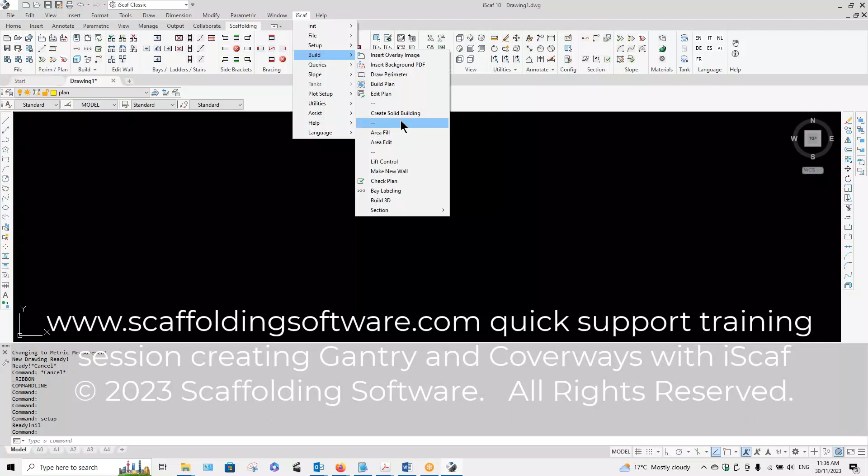So what I'm saying is, yes, in the future we will have something like a make gantry and build gantry option as well. Okay. All right.

So your gantry, is it 2.4 meter wide by 2.4 meter bays? 2.4 meters wide by 1.8. Okay, so 1 meter long, am I correct? Hold it, so 1 meter long bays, so the fit type. 1.8. Okay, so it's the other way around. Let's start again. The bays are 2.4 long and 1.8 wide.

Yep. Okay, so of course they can be any dimension based on whatever scaffold you're using. All right, so 2.4, let's do this again. It's going to be 2.4 meter long and 1.8 wide, right? Yes. Okay, and because it's a gantry, we need heavy duty, so we want truss transoms, correct? Yes. Correct. Okay, so that's fine.

And of course, we have no hop-ups, right? No hop-ups. No. Yep. Okay. And how high is the gantry? What's the top working deck? The gantry is 5.2. Okay, so it's going to be 5.2.

Okay, so I think we can just say 5, and the jack extension can handle the extra 200. Yep. Oh, look, just for the purpose of showing you, let's go 5.2 anyway.

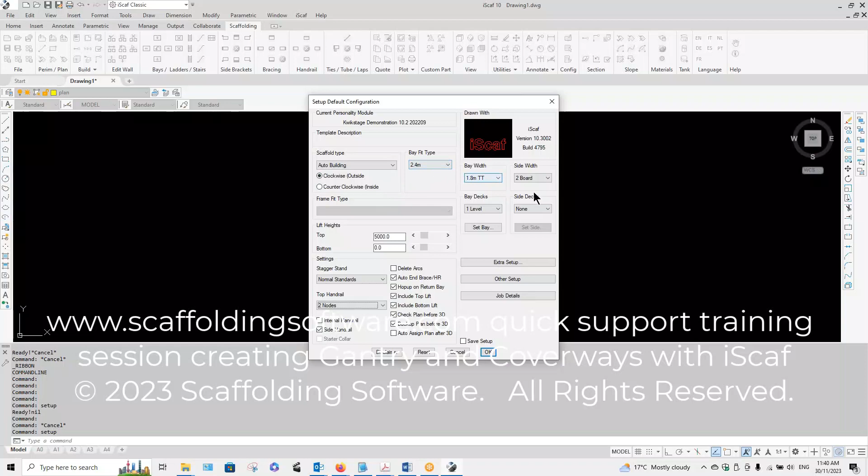Okay, and then do you need internal handrails on the inside as well, or only the outside? No, just the outside. Outside only. Okay, all right, so we can do that. Okay, so that's our setup, that's our basic setup. I don't think there's anything special we need to do here.

It's going to be 2.4, so that's fine. Okay, any particular wall tie you can think of? Yeah, just the standard, I'll just leave it. Okay, I'll just leave that.

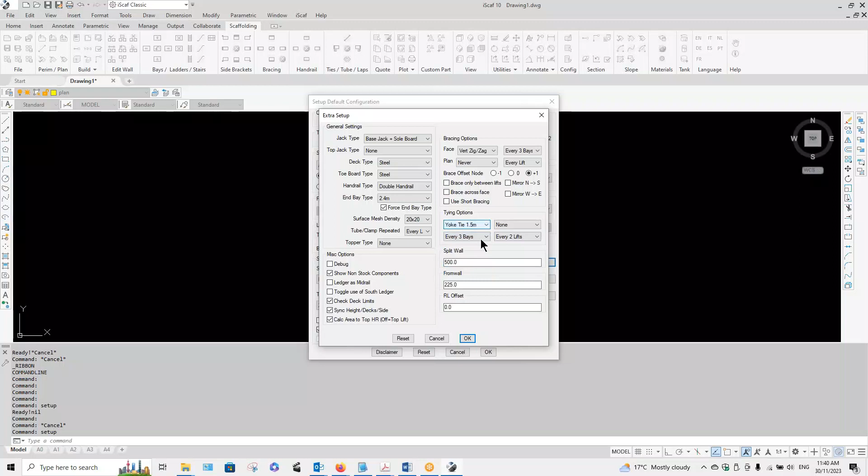All right, so how many bays is this gantry? How long is this gantry going to be? One side is 100 meters and it's like 90 degrees. The other side is 40 meters. Wow, okay, so let's keep this simple.

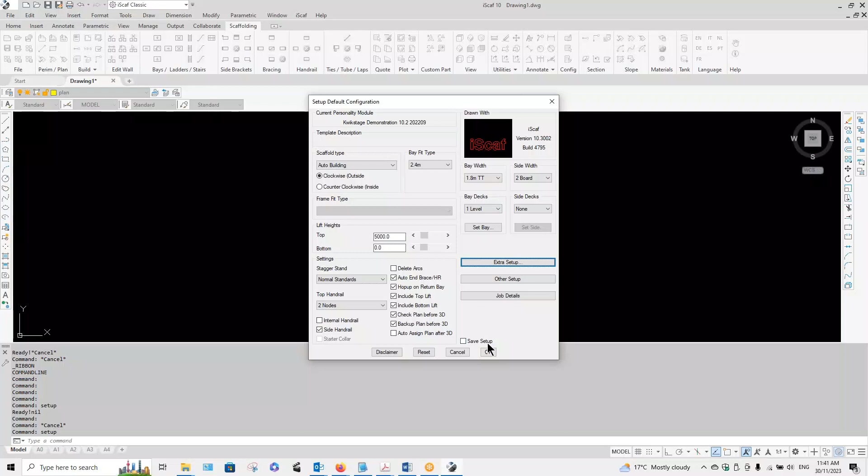We're not going to draw that. You know how to draw walls. Yep, you'll be able to do this, and I'll be able to help you a bit more later. But let's just do a 10 bay - let's just do a 10 bay scaffold of a gantry. Okay, so click OK. Yep.

And then I'm going to perform a make wall. Mm-hmm. And then I'm going to force that to be straight, and I'm just going to make 10 bays. Yep.

Okay, so from endpoint to endpoint. So as we said, let's start again. 2.4 long and 1.8 wide, right? Yes.

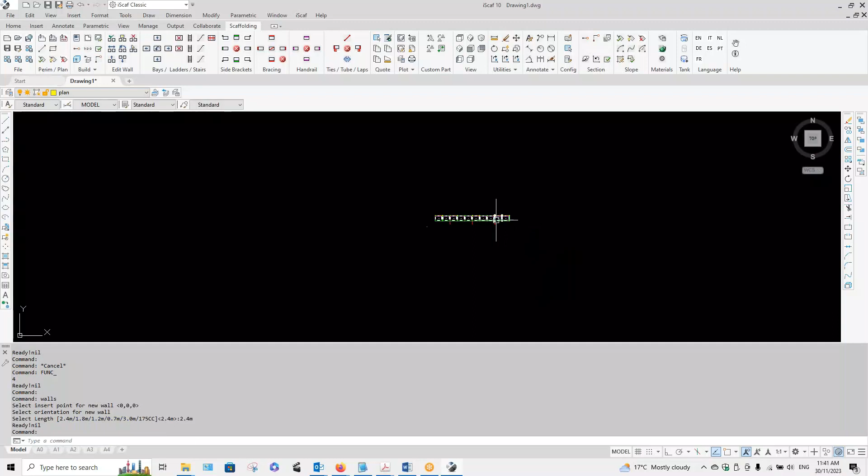All right, now we both know when it builds this to 3D, it's not going to be right because it's going to put too many transoms on every 2 meter level, right? You understand? Okay, yep. Right.

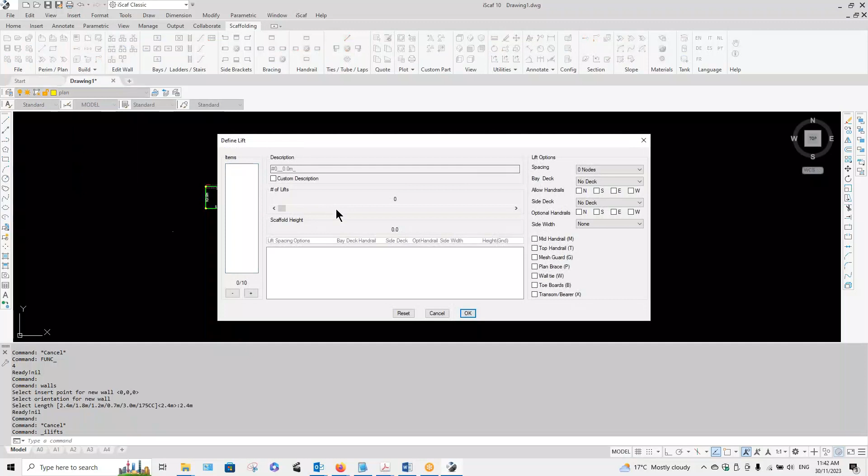Okay, so having said that, we could actually use lift control to achieve that possibly as well. Lift control is a way of... have you played around with lift control? Because there's actually a good YouTube tutorial on how to do that. See this lift control? Okay, see that? This is another way you could possibly do this, but let's just use the old method before we had lift control.

Okay, all right, so I'm going to save this as Gantry. So save this as Gantry 1.

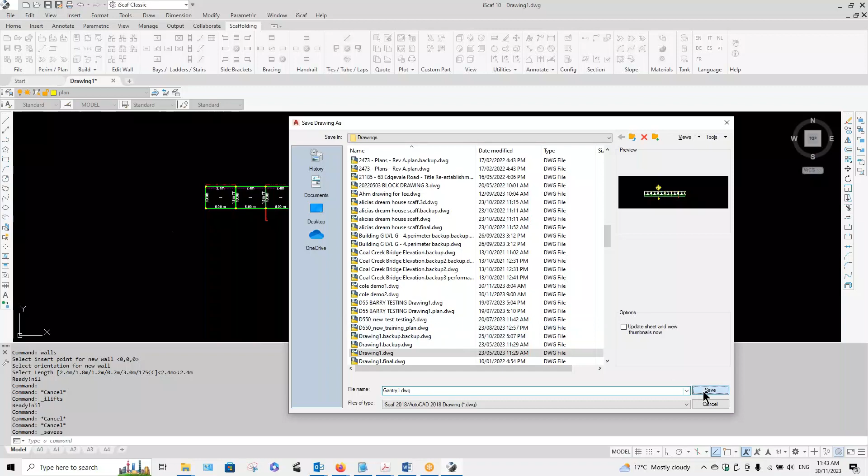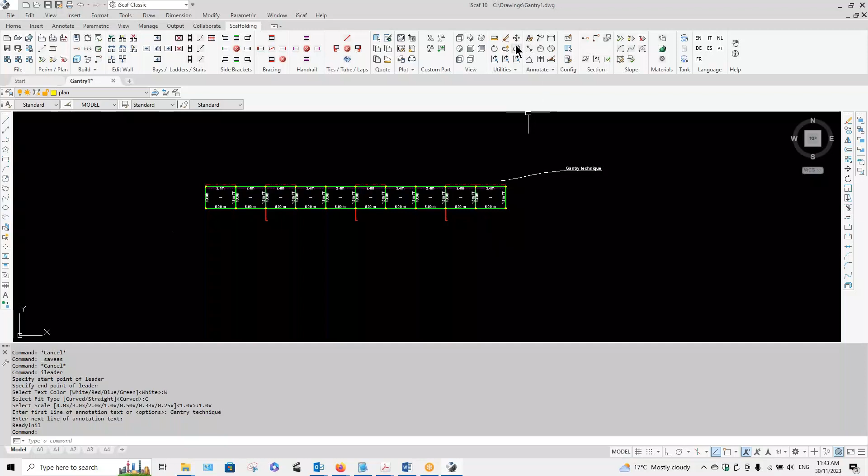All right, now as you know, you can annotate this and explain everything you want, right? You can actually use arrows and things like that to annotate the drawing and write text. So under annotation, you can just have this and say, okay, but you can write your own, whatever special style of gantry you're doing, you can annotate that the way you want, right? But you can also say things like, do another thing here, draw some more text here, just point to here.

Am I correct in saying you would want double-legged standards? Yes, please. Yes.

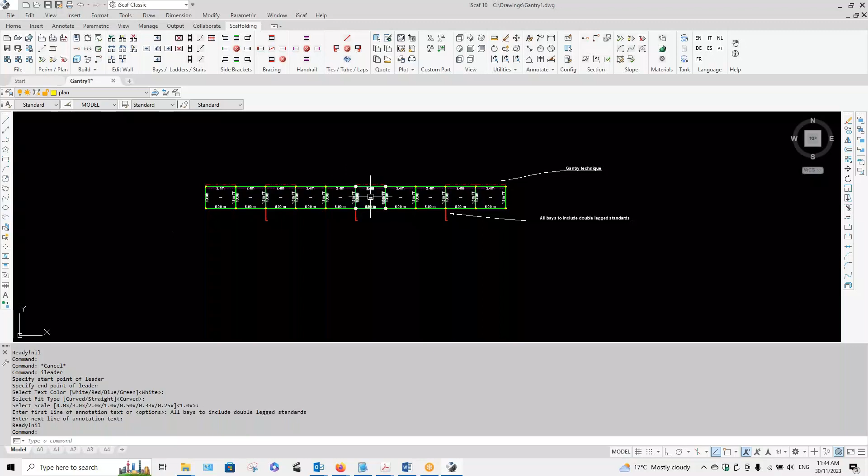So in some ways, this is already in plan, that's a gantry, right? Okay, the users don't have to see more than that for a plan design. But of course, in 3D or in a side elevation, they may want to see that. And also, this design is not going to give you the correct quantity list at the moment.

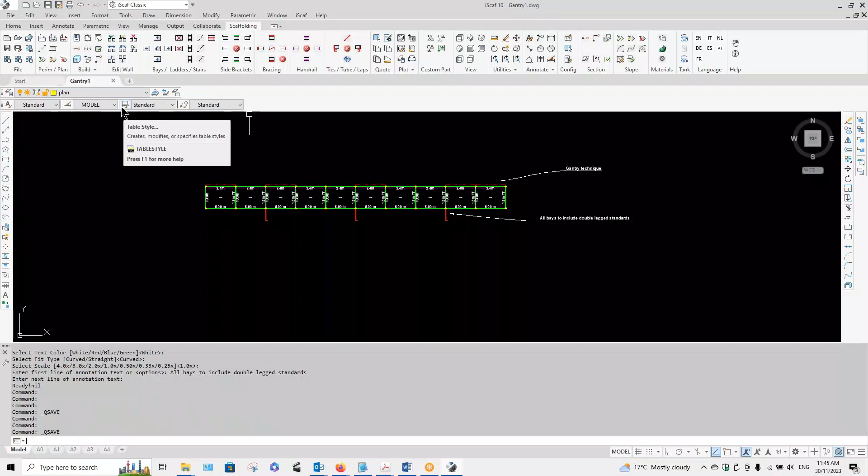But let's save this as it is so far, and then we can build this to 3D. Okay, so we just build this to 3D. Yes, yes, and we build this on. So we know straight away, okay, so this is our 3D, all right?

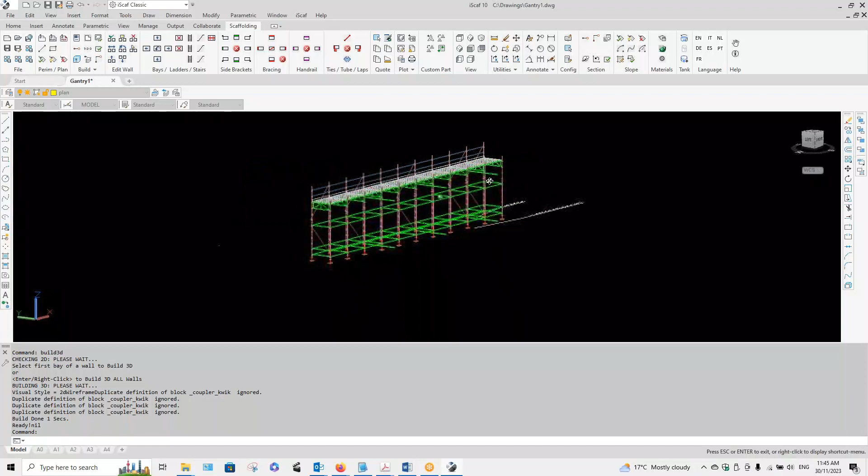So we have an issue here in that we don't want those additional levels along the way. Okay, but that can be done. So this is how you can do it, all right? I'm going sideways, and I can actually erase, under utilities, I can erase these transoms, right, like that. Okay, I'm windowing that, and they're gone.

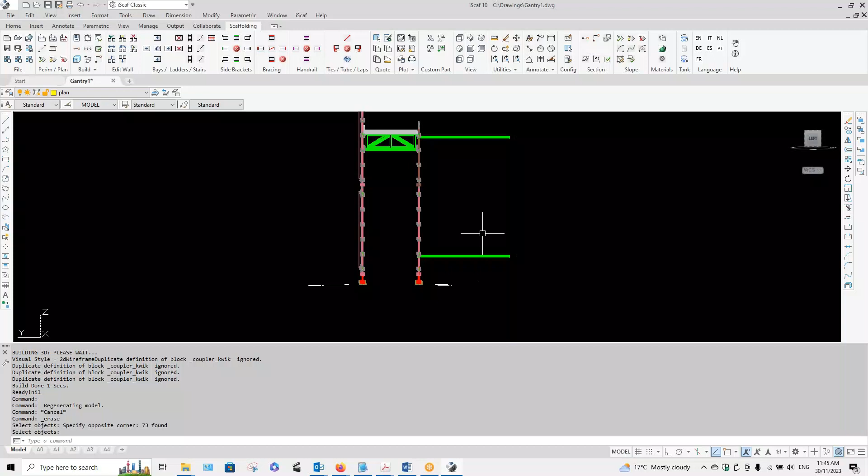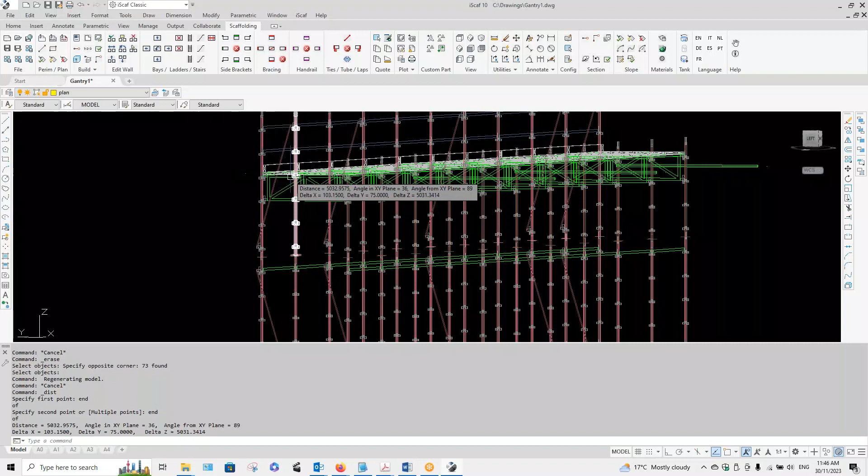Okay, so there's our 5 meter. If I measure distance, utilities measure distance, I go from the bottom, so I can say endpoint of there to that deck here. So that can be the endpoint of this, say that deck there. All right, so that's, yeah, it's just over 5 meters. All right, it's 5 meters. Yep, a bit of extra jack extension can actually make it go to 5.2.

Okay, the next thing is the double-legged standard is another technique. Okay, so we look back at the plan.

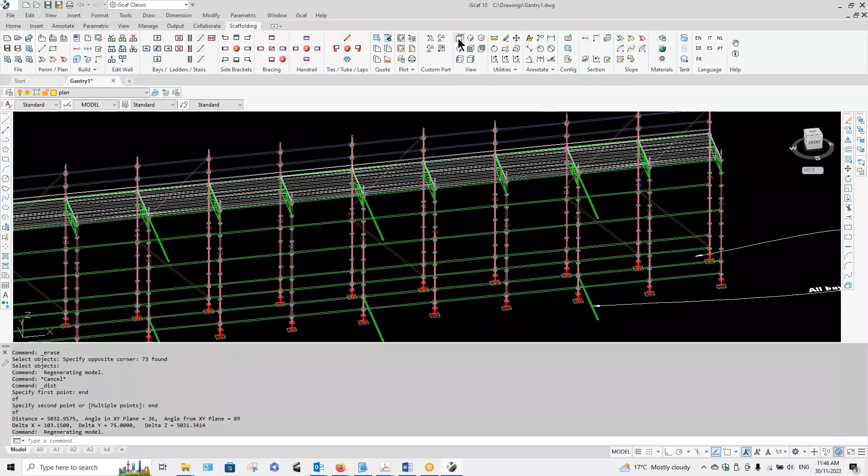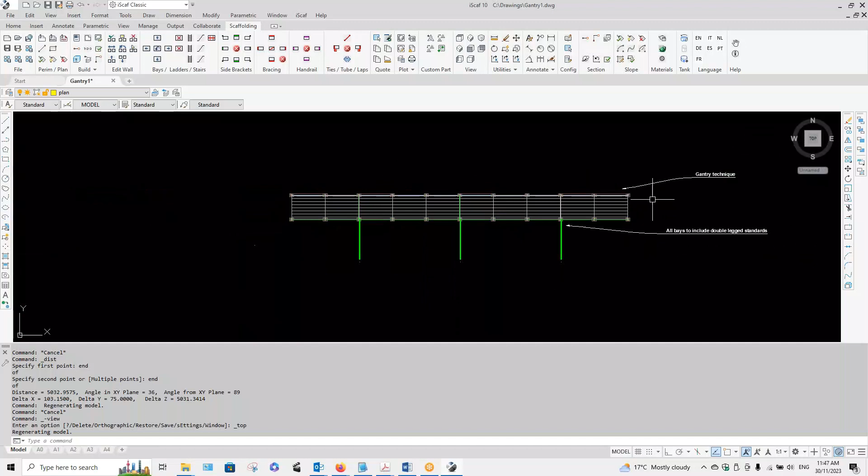Remember, in 3D, whatever you change will be in the part count. So, sorry to interrupt, so we are in 3D, so how can we go back to 2D? We don't have to, because 2D is already created, the 2D. Okay, right, 2D is done. Right, okay, so but if I want to make any adjustment or change, do I need to go back to 2D?

I know what you mean. Yeah, correct, if you made a mistake, yeah, correct. You need to make sure your plan is laid out as accurately as possible, because if you make a mistake, for example, you didn't have enough bays or something, you needed to create more bays, then you would have to rebuild it all again and then perform this editing all over again. Yes, right, yeah, so but in 3D, from now on, if I'm happy with a plan, everything can be done in 3D, I don't need that plan anymore.

Okay, you can print the plan separately. You can have the plan in a separate window separately. The plan is saved as a block anyway, so you can still show that. Okay, right, all right, let's continue.

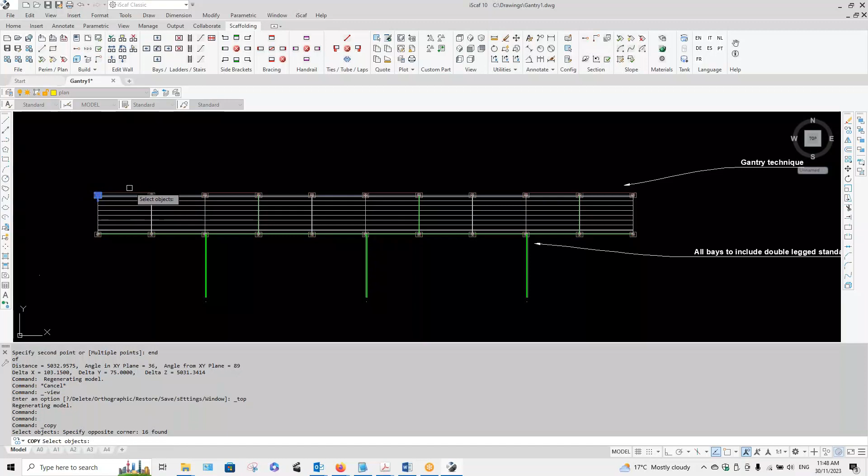All right, so I'm going to create double-legged standards using this technique. I click on copy and I window from left to right each standard. Sorry, 2, okay, so I'm windowing every leg manually. Okay, so it's selecting objects for the actual copy command.

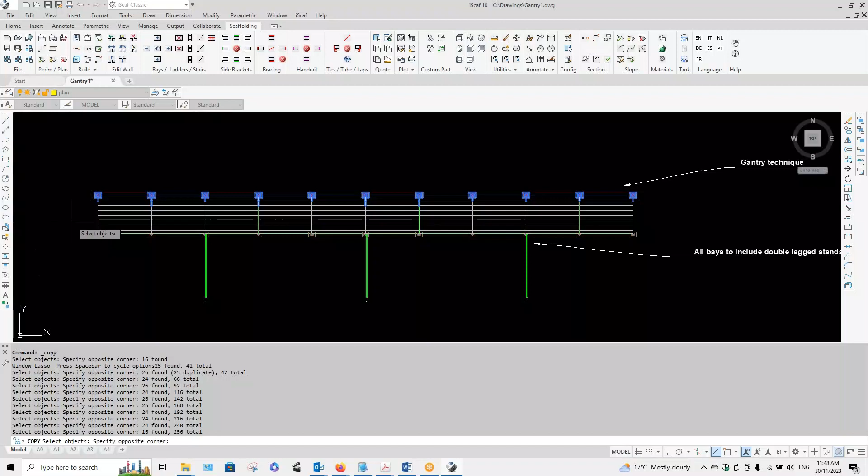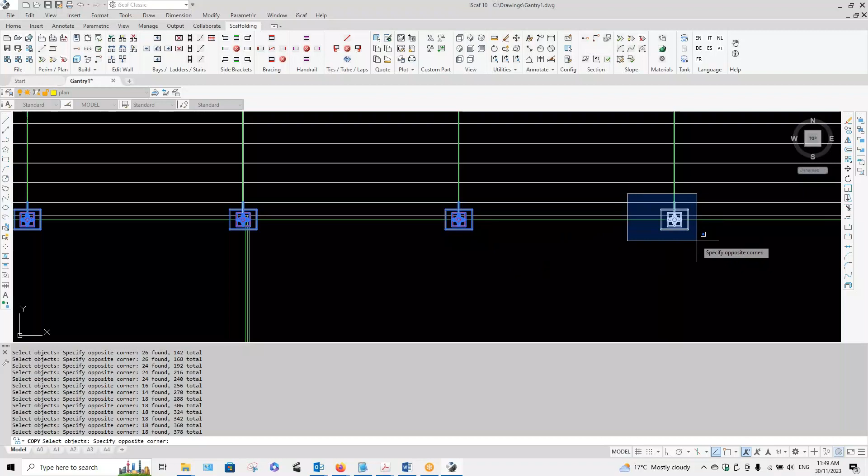Okay, so just be careful here that I don't window too much, right? So we have to do it from top left to top right, and then go to bottom left, bottom right. Doesn't matter what order you do it in, but you need to window each standard as a top left, bottom right window. You don't want a window from there to there. Otherwise, it'll select too much.

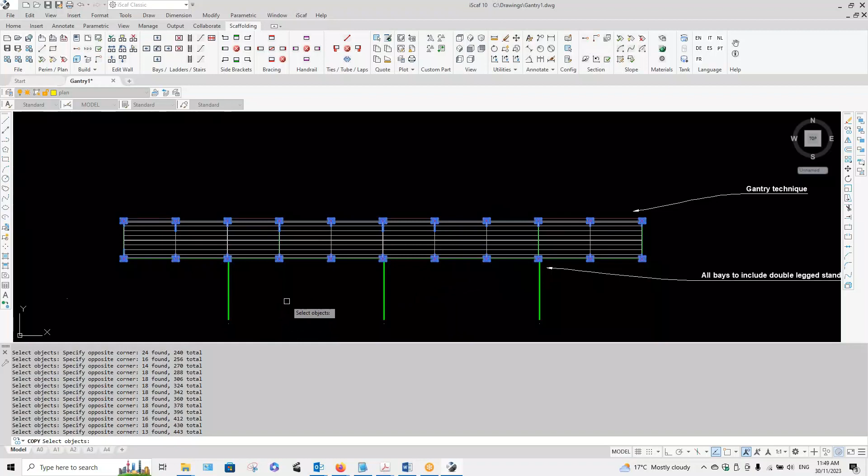Okay, so I've windowed everything. I right click to say finish selection. And then the base point is going to be just, it can be anywhere, right? I can just do this. I can just say base point can be just close to the edge. And then the next point is going to be just offset, right?

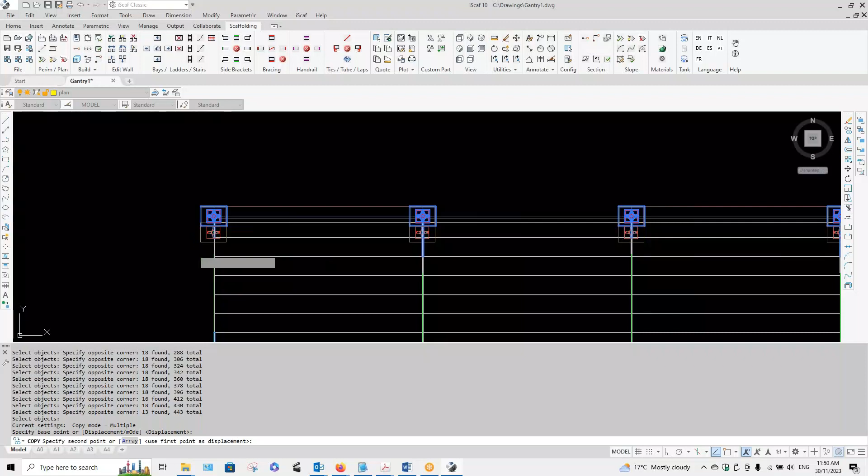Let's just go, is it normally like that? No, actually. Or is it like that? No, above. Sorry? It's above the original, yes. But the top one is... Let's see, if I do that, notice if I do that, it's going to copy it south on both. Yes, in that case.

Okay, so I'm going to actually press enter to finish now. That's done. So that one's actually you could do a copy of that and then move it over there, and you do a copy of that and do it over there separately. So yeah, you can do whatever much you like. Better. Okay. Yes. All right.

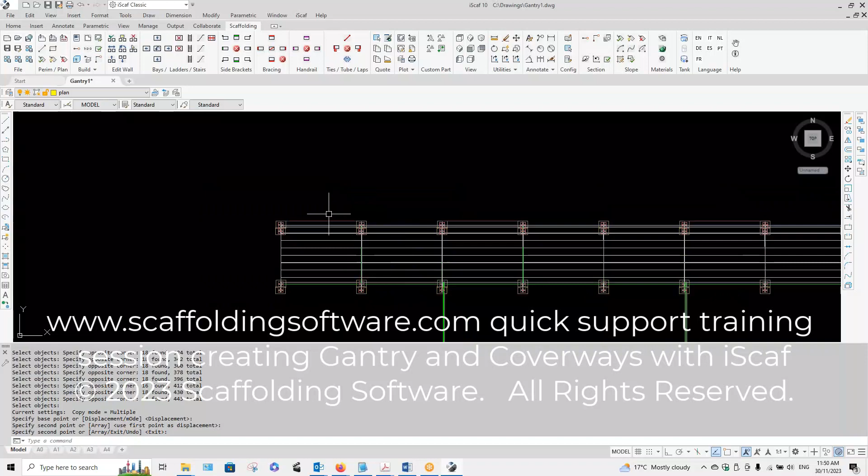Okay. So if we go back to our 3D view now, we have double-legged standards. Okay. So this will show this double C clip as well on the. No, that's a manual copy. There are no double C clips.

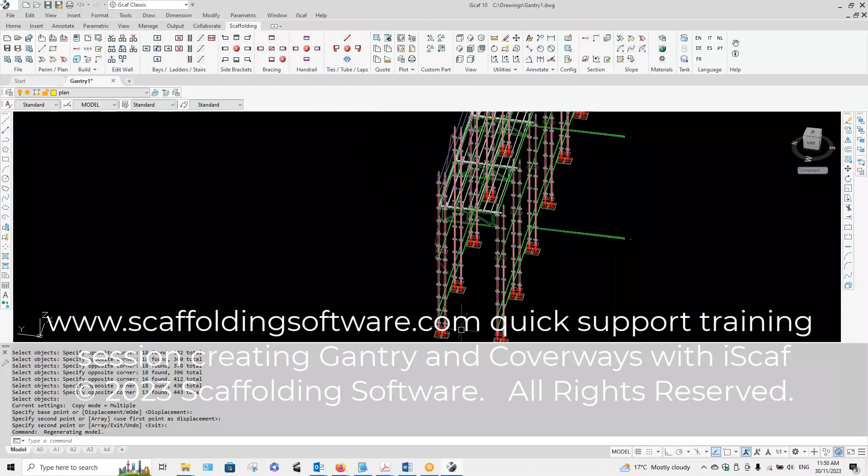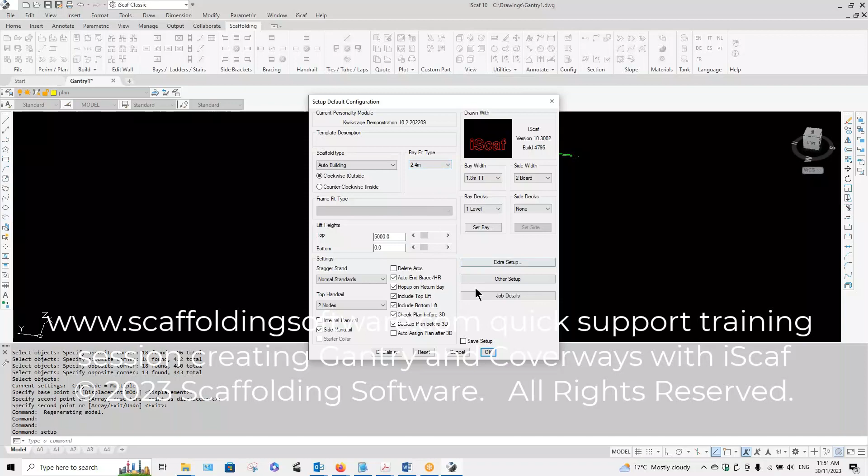Right. Now, okay, we do have another module that you could almost say that a double C clip is like a ledger, but you're going to have to manually put it in there. So if I go back to setup, your module, depending on your module, you may actually have a bay size, which is a double C clip. Look at that, that's a double C clip. Okay, so that's 175, possible. That's possible. Okay. All right.

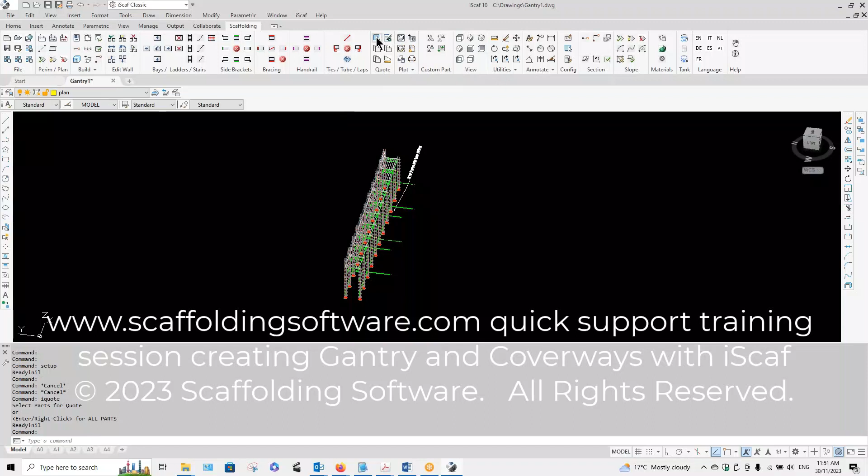So you can also create some annotation as well. Go back to your plan and say double C couplers, right? And this is an accurate material list. So if we actually go to queries and a quote, right? We have a material list for this gantry, right? But we can also use extras, remember? So back to queries, quote, extras, right? We can manually add in double C clips, okay?

Double coupler. Right, so we can just say 40 double couplers or 42 double couplers, whatever we like. So that is included in the material list. Yeah, like there, right? In addition to what we had there already.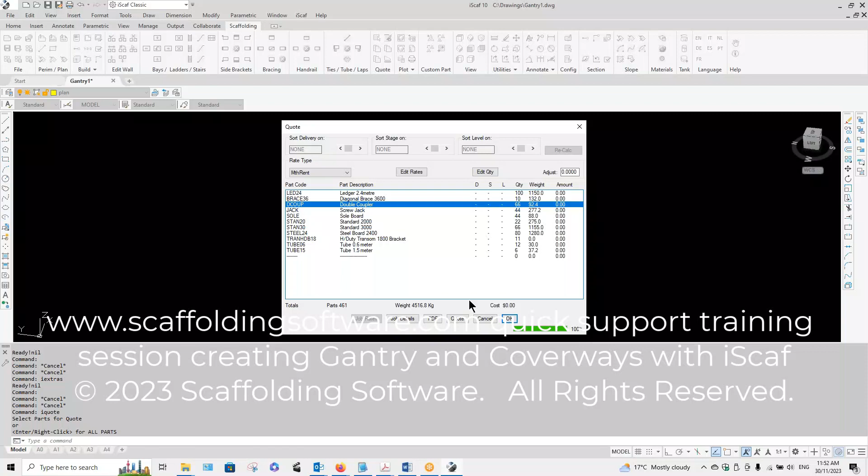Okay, so this is one method of drawing a gantry, okay? Does that look reasonable as a first bit of technique to show you that? And of course you can go to visual styles, okay, visual styles, and go conceptual, and you can see that like that.

Okay? Sorry, Andrew, which button you just click to change the view? There are many tutorials with this. You need to look, okay? Oh, video conceptual. Okay. Yeah, we've had this special feature. We've had this for quite some time, and we recommend it. Definitely have a look at the YouTube videos. It shows you some of the different ways of doing that.

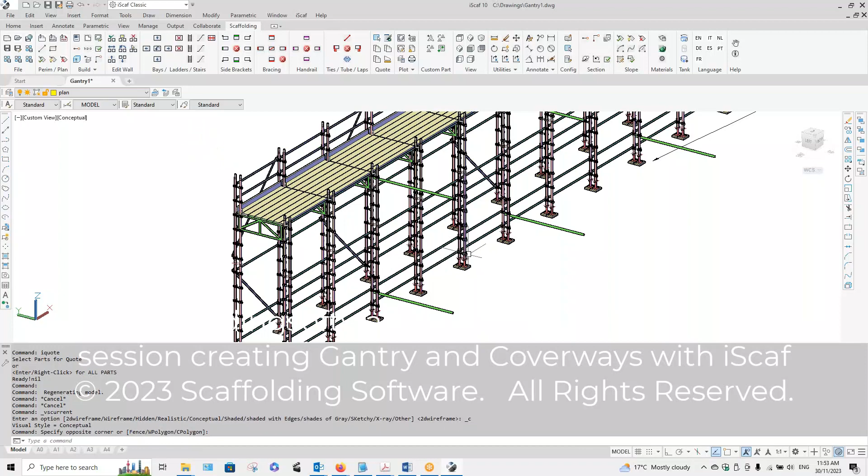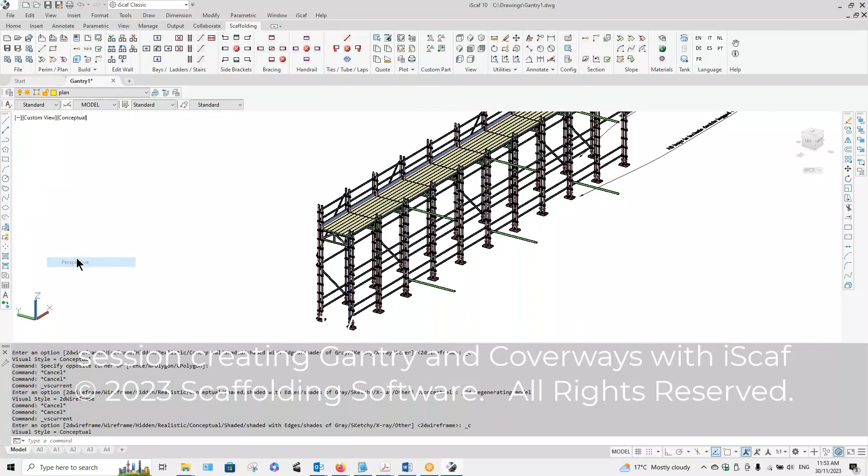Okay. Cool. So yeah, so that's one method of doing gantry. Now, while I'm here, if I go back to our 2D wireframe, by the way, just another thing to show you since we're here. See how there's 2D wireframe, right? And let's go back to this again, that conceptual. But you also got a custom view and you have perspective. See that? See how it's going away from you? Okay, so that looks better. That's like a camera, a photograph of the scaffold. Okay, so let's go back. Let's go back to 2D wireframe. I'll leave that like that.

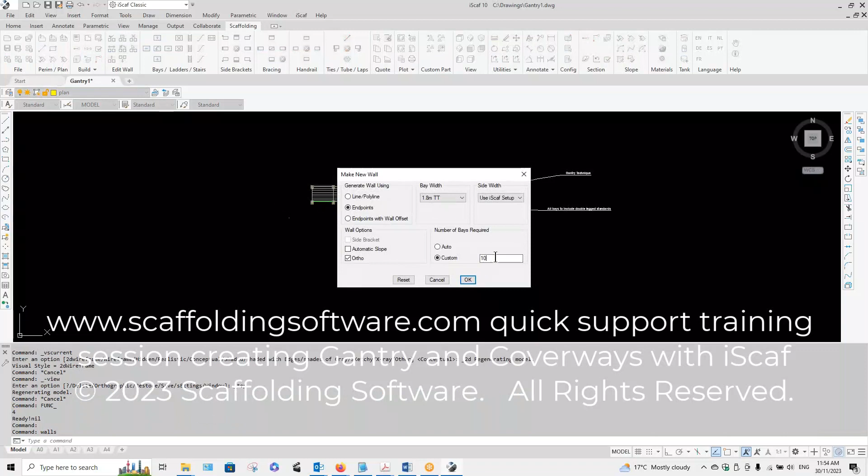So if we go back to plan now. Okay, let's try the other technique. So we actually do another make wall. This time let's just make 8 bays. Keep everything the same, and just do this. Okay, 2.4, same thing as before.

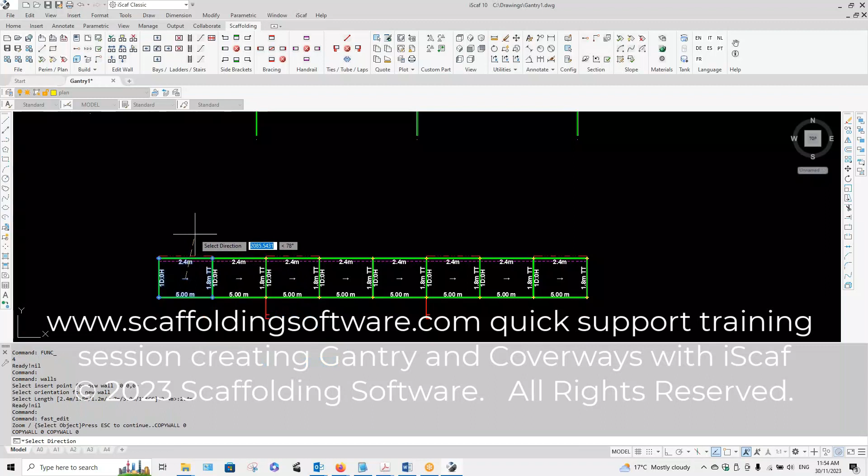We can add. Let's do this. Let's do a go into edit plan. Go into here and say wall copy. Okay, wall copy. We're going to copy it that way, and we're going to copy it double C couplers. Look at that. All right. Same thing. Okay. Wall copy.

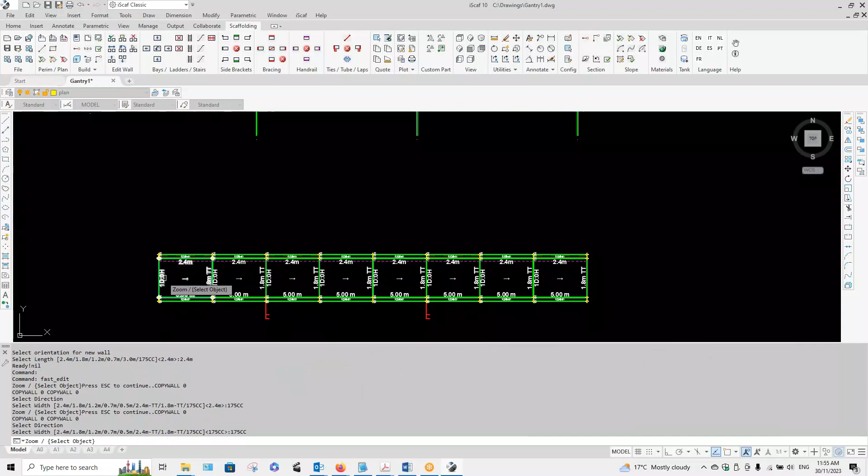This time south double C couplers. All right. Did you want handrails on the end? Yeah, definitely. Yes, so don't forget to, if you need to, go to handrails, handrail on the end there, and a properties handrail on the end.

Okay, so here is our other gantry. So this can is much now better. Escape out of that, and we can build 3D on this.

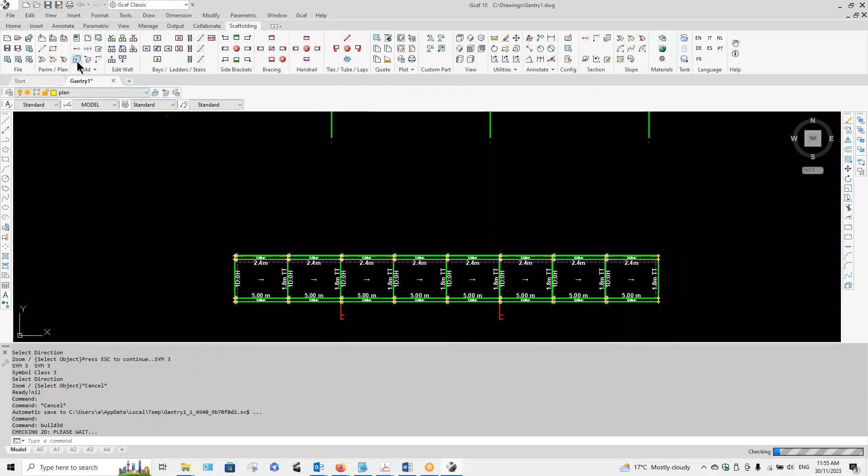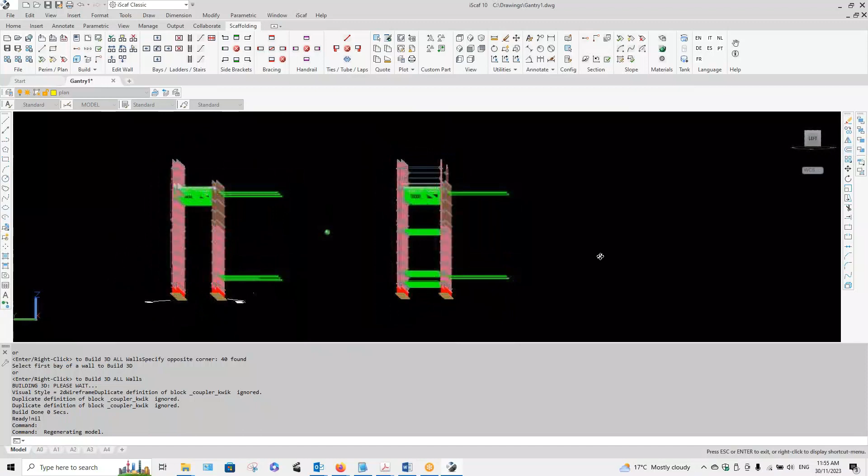Okay, so that is another way of, I'm not 100% sure if your module has a double C coupler, but it probably does. That's similar, right? Same thing, you need to erase the transoms that you don't want. Oops, sorry, what happened there?

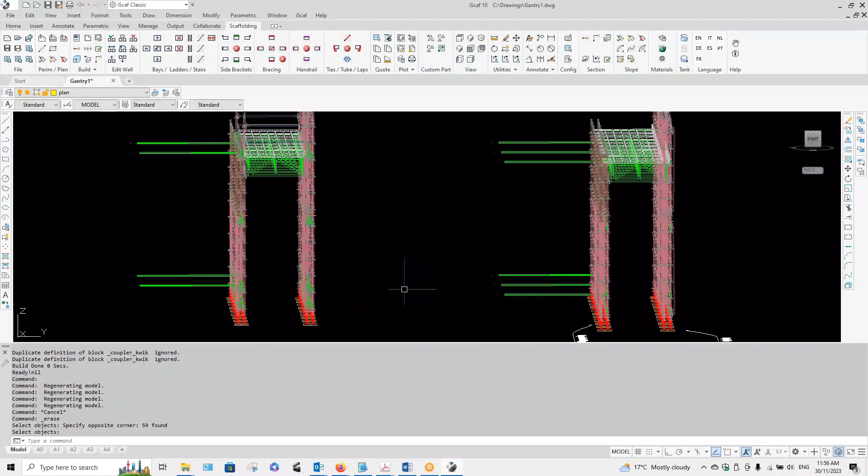I lost it, let me go back here. And then utilities, erase. You're right, this is probably a quicker way of doing it. Okay, so there's our gantry going that way. And again, same as before, we can go back into wireframe and conceptual.

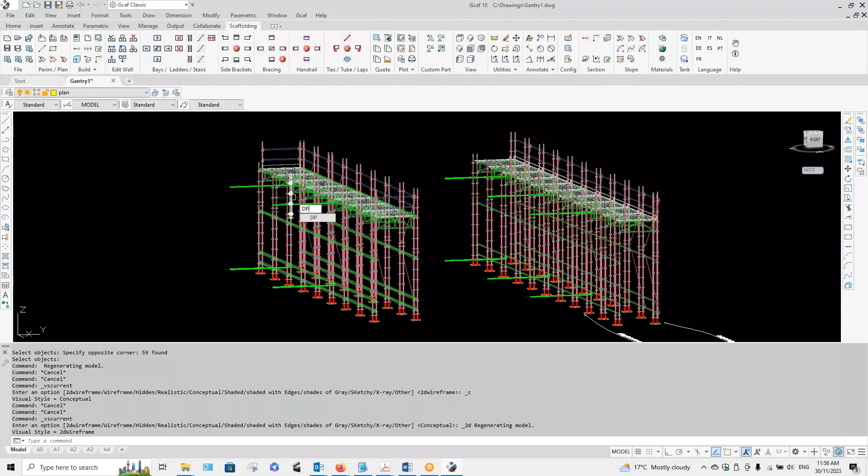Okay, so here's another method now. Let's go back to wireframe again. This one, because it's a newer feature, I'm not as familiar with lift control, but there is a tutorial on that.

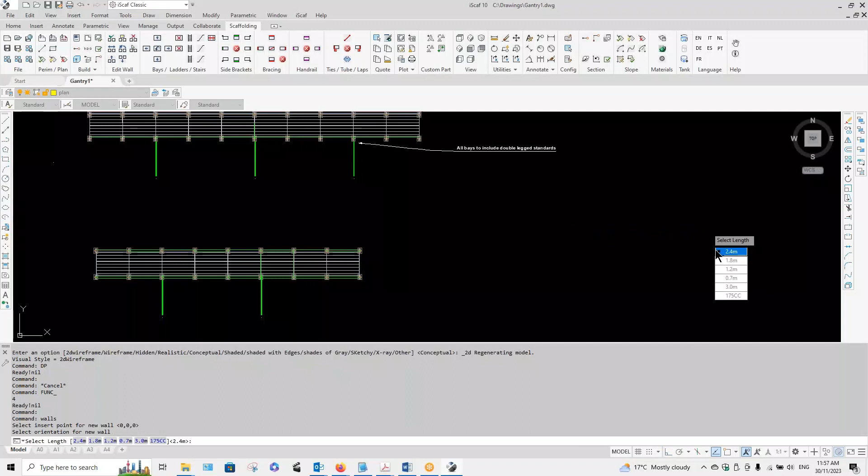Let's try making another wall. So we do another wall. Let's do 6 bays, and let's go over here. All right, I want to use lift control.

So that is lift control. I want to create basically only one lift, 5 meters off the ground. So that's going to be, well, first I have to have a lift control method, and I can give that a name.

Okay, gantry, let's just say gantry. Gantry 1. And then this is going to have one lift. And it's very simple because it's only one lift, and it is going to be how many nodes off the ground?

You might need your help here. Doesn't matter, just say, let's just say 10. Let's just say 12. Yeah, let's just say 12 nodes.

And we don't have side brackets, we don't, so that doesn't matter. Got a one deck on the top. We don't, oh yeah, so there's going to be a deck. Yep, good. There is a steel deck on top, and that top deck is going to have handrails on both sides, on the north side.

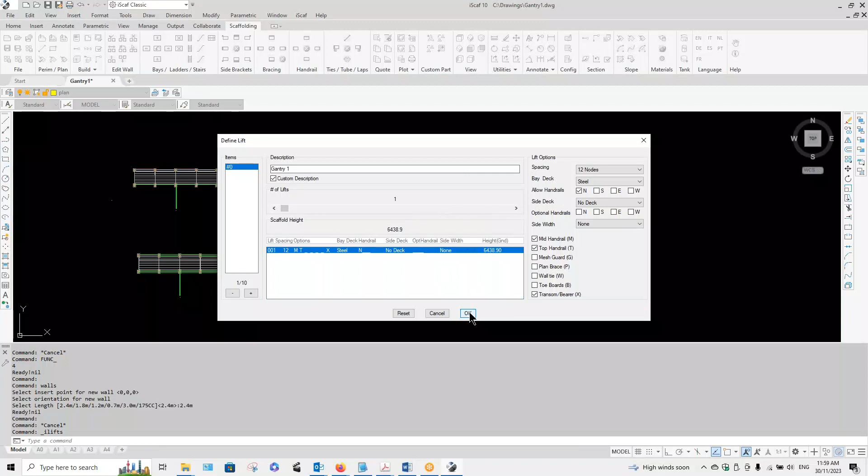So we click OK on that. And then we need to edit this wall to use that lift control style. So I go into my edit mode, and then I go to edit wall details. And then under lift control, it's not disabled. We want it enabled with Gantry 1. And we want to apply it to that.

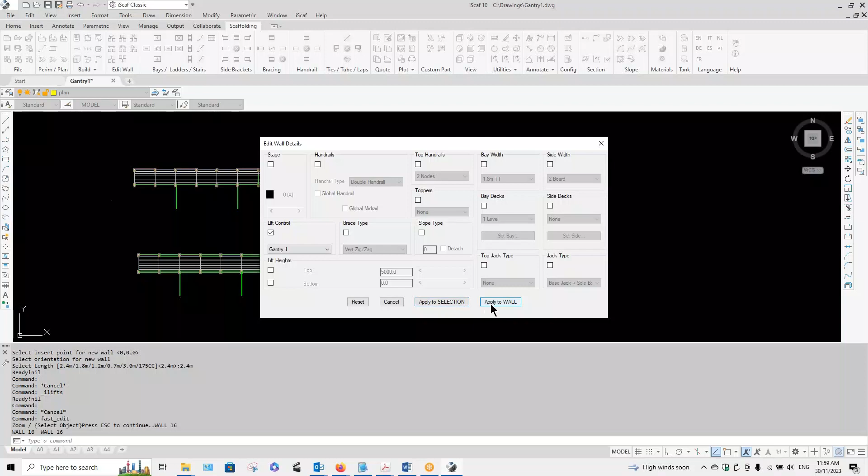And all this other information is generally ignored because lift control will take priority. Okay, so I say apply to wall. So this wall now has the lift control applied to it. So that's a 5 meter.

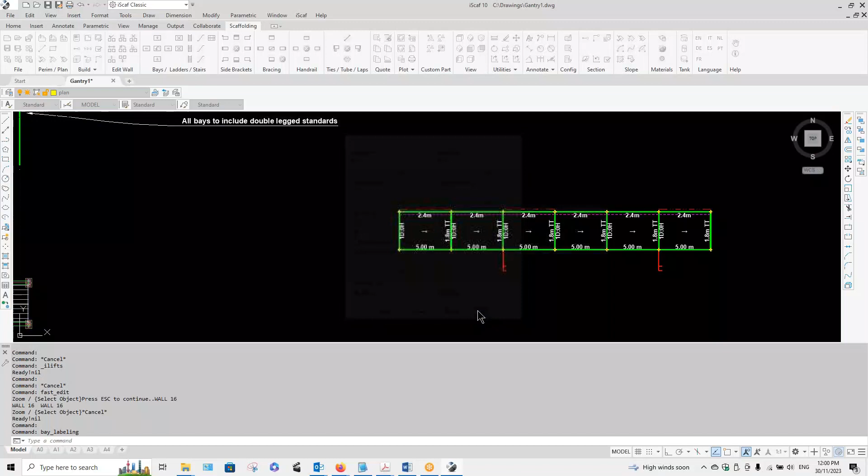Let's just do the bay labeling. Let's do the bay height. Let's just double check to make sure it's got the correct height. It's reallocating that. Did I? Anyway, that's interesting. I said 12 nodes, didn't I? And I don't think 12 nodes is 5 meters. I wouldn't have thought so.

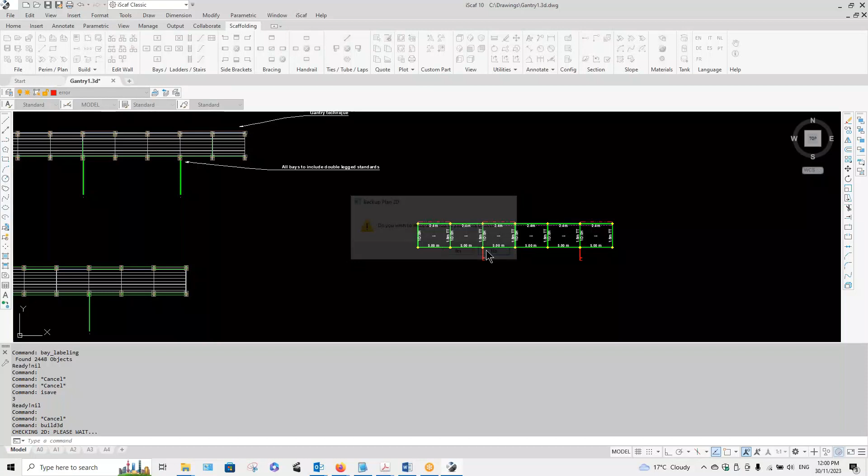But anyway, let's build this. So let me save this as a 3D since I've already built most of this to 3D. And then let's build this separately. So I'm going to say no to that one and no to that one, and put that in there, build that. So let's see what we have now.

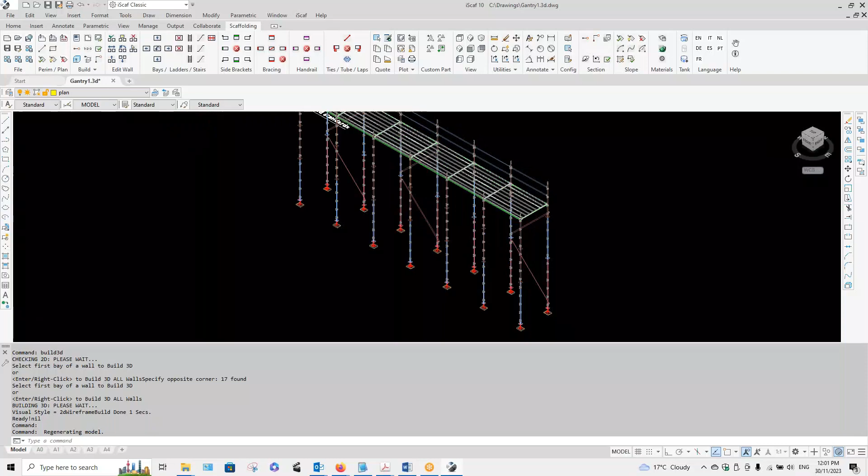Oh, wow. Okay. But of course, I needed to, so that actually worked. But I just needed to put those double-legged standards in, and I also needed to specify truss transoms.

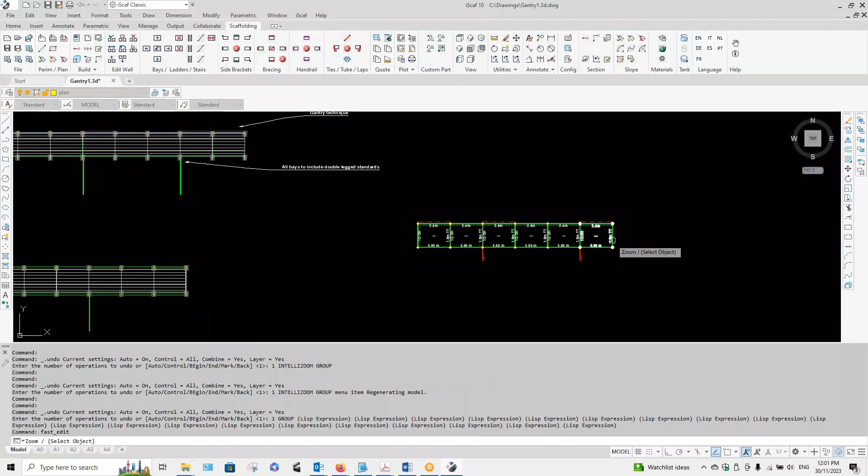So if I go back to plan here, let's sort of cheat here a little bit, and let's actually perform an undo. At the moment, do I have the ability to put truss transoms? That's a question, and I think the answer to that is probably no at the moment.

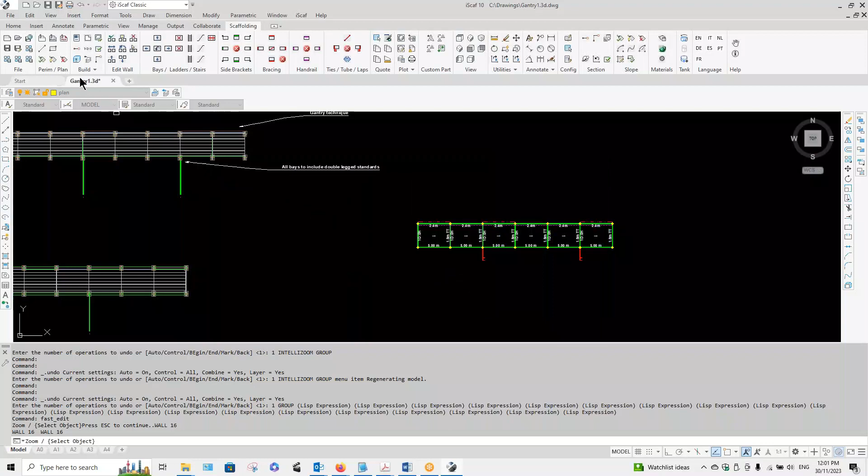So if I say edit wall details, truss transoms is actually selected here, but it didn't seem to put those in. It may be that in the lift control, we need to have a separate option in here for the actual truss transoms. So there's no option for truss transoms in here as far as I know, but I'm sure that's a feature that's going to be coming quite soon.

So definitely stay in contact regarding this, because I'm pretty sure next year, 2024, we'll have the ability to put any type of transom using the lift control.

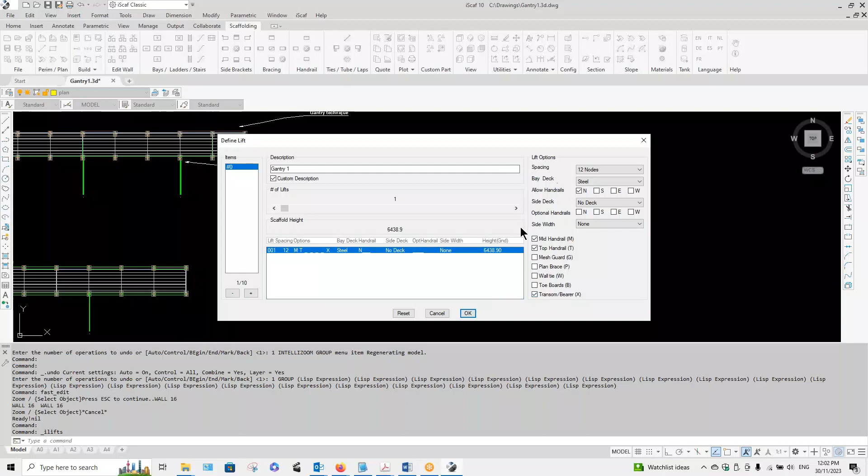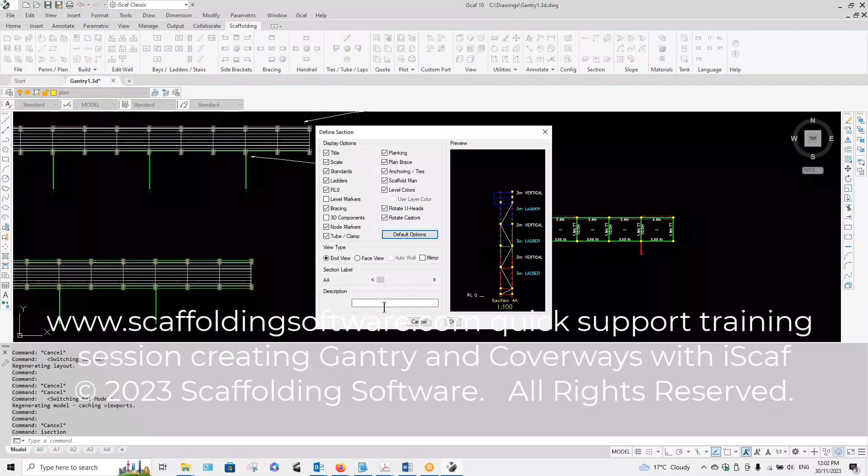So there's a bit of training for everything. Remember, you can always use your drawing sheet, and you can create sections as well. So let's use the create section option, say default options, section AA, and OK to that for an end section. We can window that, right click to say we're happy, and here we have our gantry.

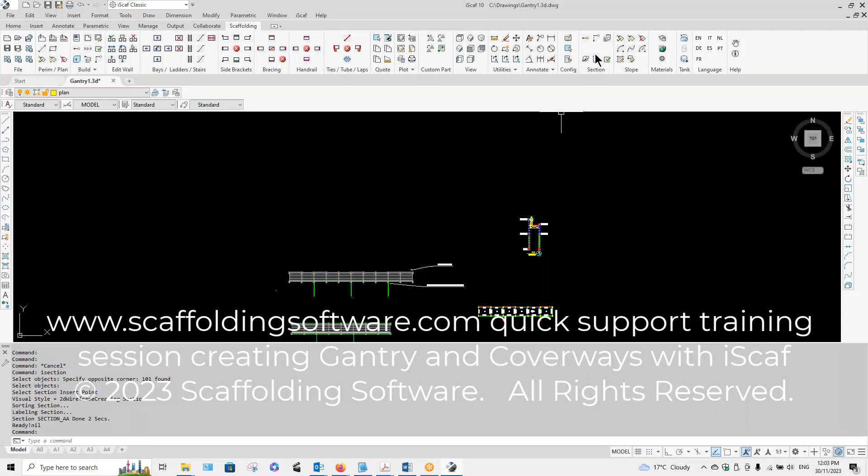All right, so there's a lot there. Now, Danny, here's something else. If we go into utilities and insert block, we go to the bonus block area. We go back to metric, and quick stage - sorry, it's called Coverway. So a Coverway is also a gantry. There are all these different ones we have here. This is our library - these are actually just drawings, but not 3D. These are different types of gantries you can put in just to annotate your drawing.

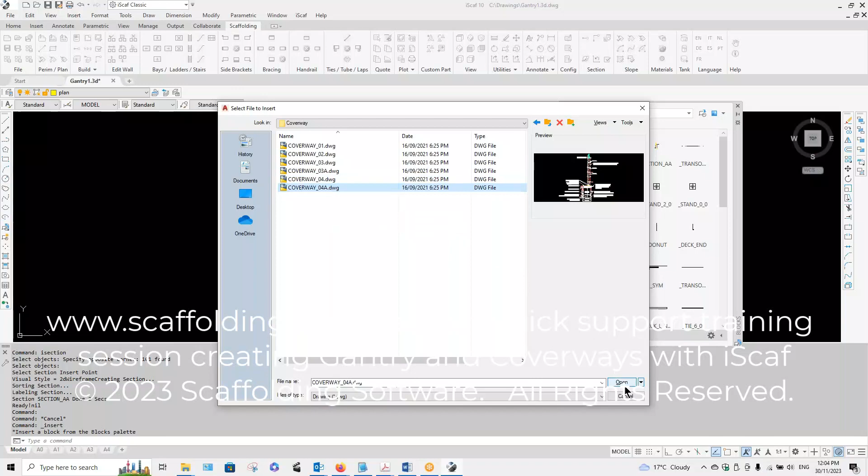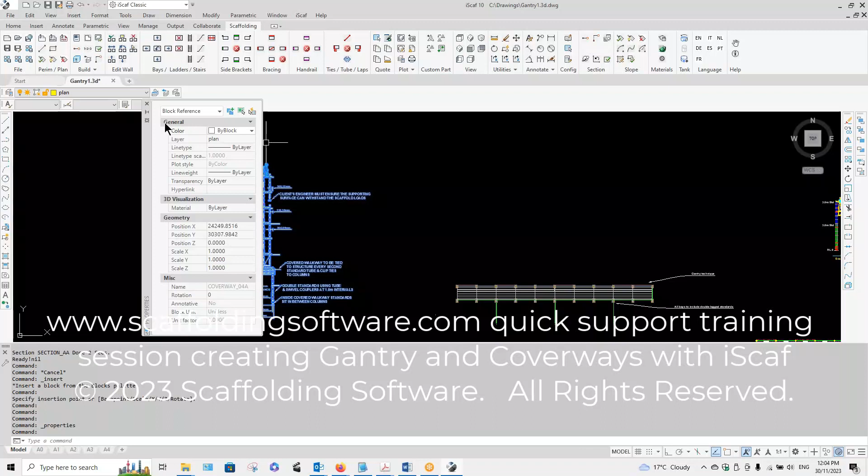Let me give an example. So let's just insert this into here, right? We have a library of pre-drawn gantries. Let's click on the block and go to properties, modify properties, and just move that into a different layer. I'll just force the color to be a normal color - make that just normal white.

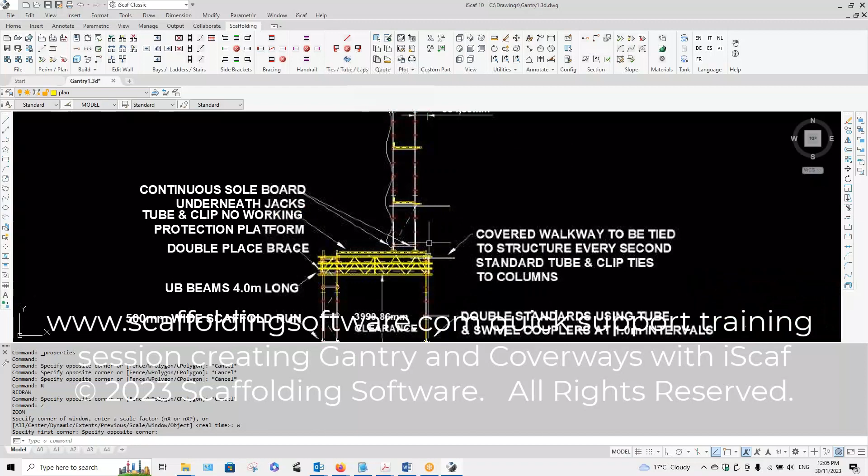Why isn't it redrawing? Let's see. Okay, so this is just a library file. You can put this in and do it any way you like, and modify as you see fit.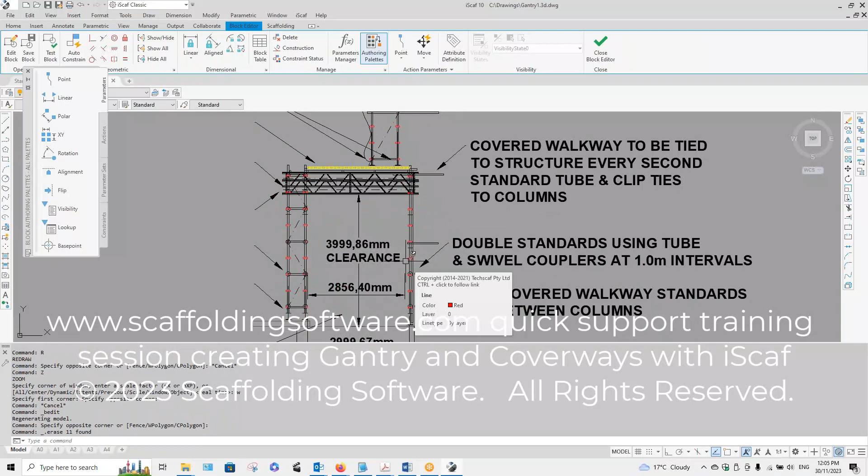So you can actually go to edit. Under the block edit, you can select this gantry, Coverway, and move things around and edit things. You can window all that and say I don't want that. But this gives you some good ideas on what sort of text and information to put in here. See the shade cloth - I can delete the shade cloth and copy and modify, right? With your 3D editing, you can just manually copy parts if you like.

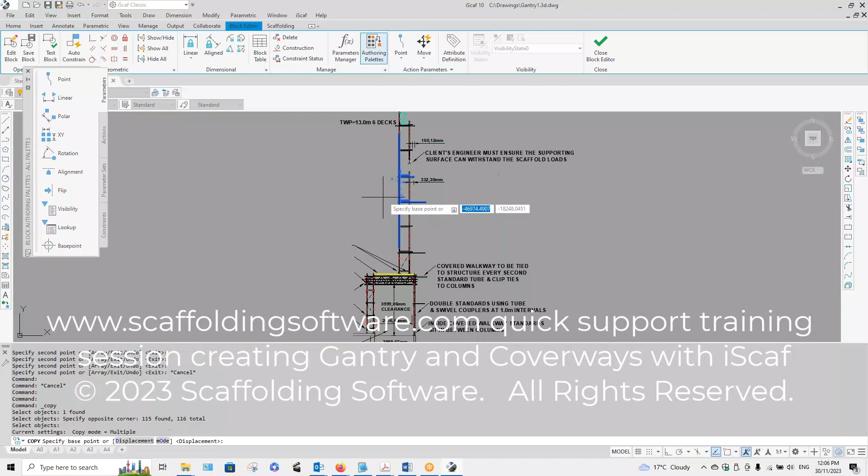Let me try that again. Sorry. Copy - is that a part that I can copy? Is that one block? I think I copied that. So I click copy, select these, and I can copy and make use of that. I'm not going to save that, so save discard. Right, so there are some other library options you can use for your gantry or any type of gantry.

Okay, Danny, is that all you need? Yes, thanks, Andrew. Before you go, can I ask you another question? Yep. About these...

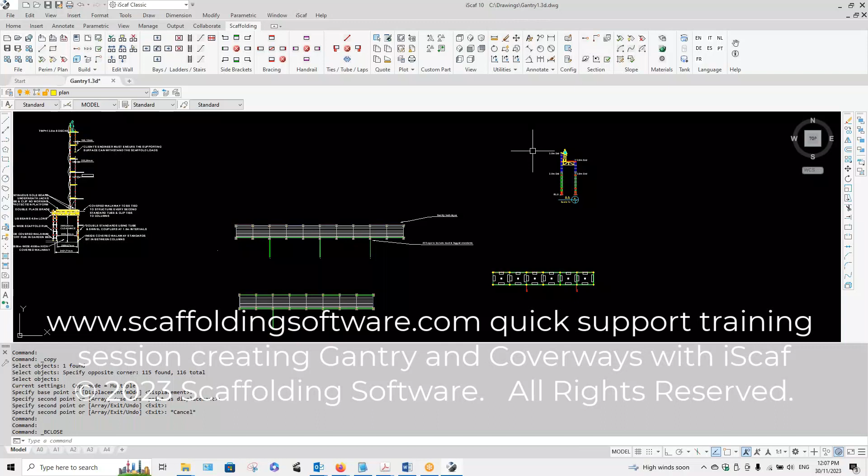Designs on a slopey roof. They have some slopey roof. So the customer wants to build on the designs around the properties, and also wants the scaffolds on the roof as well. So how can I do that? Okay, so you want to build scaffold on top of a roof, right?

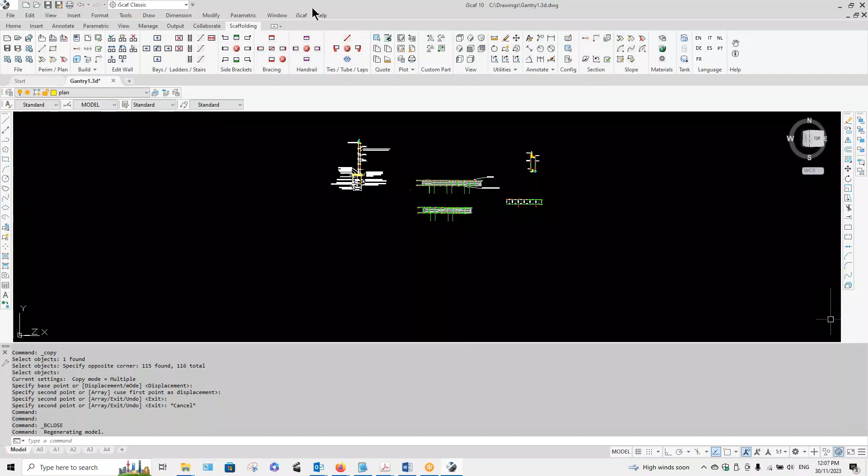Yes. All right, so that's a mesh. Have you seen the latest video regarding mesh? Just bear with me a moment. This video here shows you how you can do this. Okay, turn the volume down. So if you draw...

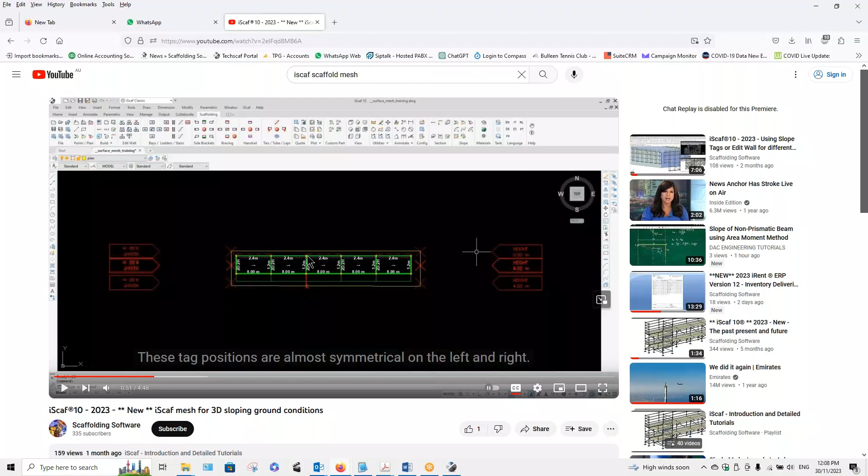Have you drawn some slope tags before, right? Like that - if you put a slope tag, this is in YouTube, right? If you have 0 there and 0 there and a number in the middle, that's going to be like a gabled roof, right? Yeah. Is that what you mean? Yes. Okay, so that's how you would do it.

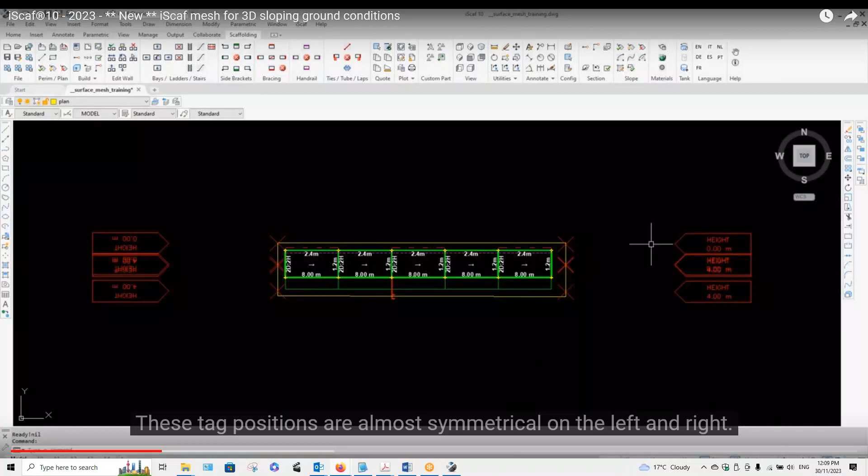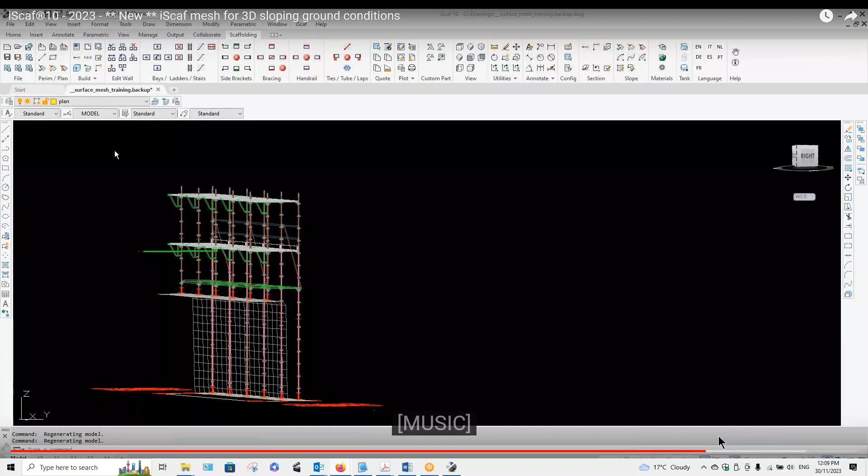And then you would actually attach the slope to the scaffold and build 3D, and your end result will be a mesh that's following that. Okay. So the scaffold will follow the mesh as long as you design the mesh correctly, as long as you define the sloping ground correctly. All right. So I recommend you watch this video, and if you put the slope tags in the right spot, then that can actually be like a roof.

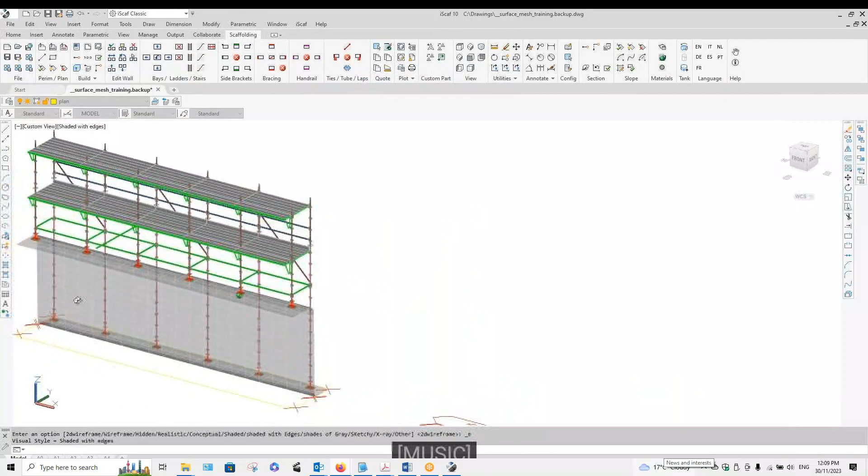Okay, all right, if you need more help we can reconnect and I can help you. Okay, cool, thank you so much, Andrew. Okay Danny, I'll talk to you later. Okay, bye-bye. Okay, bye.